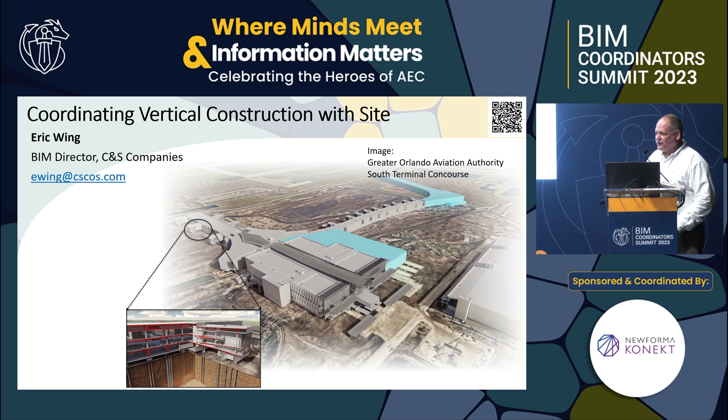So, right, this was on shared coordinates. There was one issue where they could not see it, like once they designed it and started building it, but FAA realized that perhaps there was some obstructions from the towers, so stuff had to move, and that's where this stuff starts to get off track, right?

So why are we talking about this? At first, I thought perhaps this was too remedial of a topic to bring to an event like this. It's basically coordination, shared coordinates in Revit, but there's software incompatibility, unfortunately. And it's Cesar's down here, there's no Autodesk people here, so I can go with it.

Their own products are not compatible with one another, right? You have to export stuff, you have to import stuff. It's such a workaround to get to where you need it to be. And it's tough to have to overcome that and not have a real workflow on how to frickin' do it.

Personnel incompatibility, right? Civil engineers, architects, vertical engineers, they just don't talk. I don't know, each one of us thinks our stuff is so much more difficult than your stuff, you can't comprehend how we build things. But it's that level of coordination that we need to come together. I just had to throw the word coordination in there because it's expected.

Poor or outdated site information, right? You go through all this stuff, you get your building on the shared coordinates, and like, wait, that's an old file, this is the actual survey. Damn it. That happens. It happens a lot.

And alignment mistakes, we'll get into that. We have to physically align the building with a line in AutoCAD and say, yeah, go. Let's do the $2.7 billion project with 50 different Revit models. Yeah, I think it's good. We got it, I aligned it to that line in frickin' Civil 3D, right? Or just ignoring it altogether.

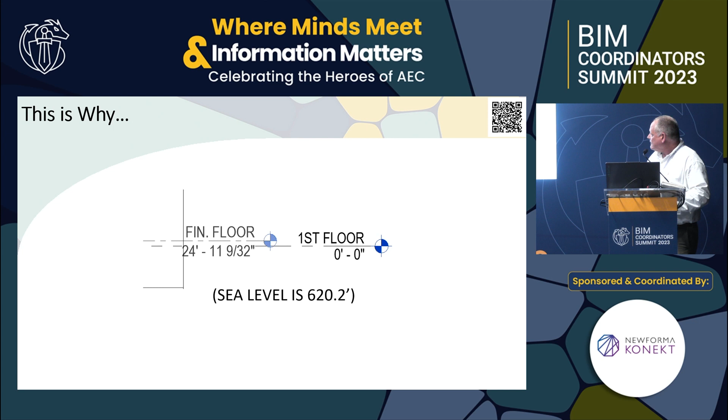So I'm looking at these models like, I don't know if this stuff is lined up or not, right? There's another one. Oh, that one, I guess they're lined up, right? I get these models and I'm looking, like something's not right here, something is not gonna work here. Look at, again, the 9/32. How stupid is that?

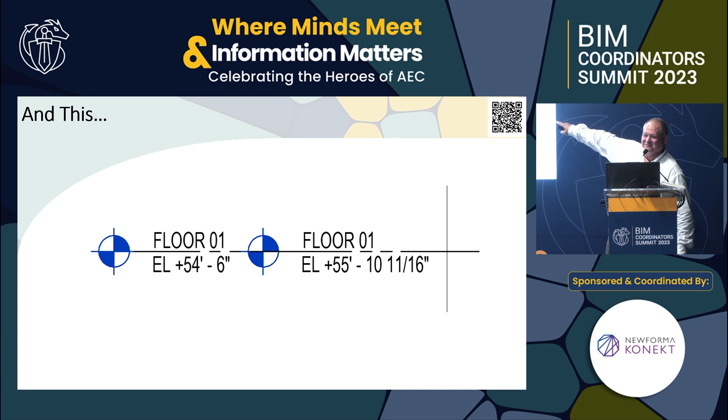Oh my God. Okay, so yeah, this one is, I don't even know why I do these slides right now, because literally I'm afraid to open these models up. Damn it, so that's all jacked up right there. And that is a project that we're working on now. It's a big airport, and yeah, so these are the things that happen.

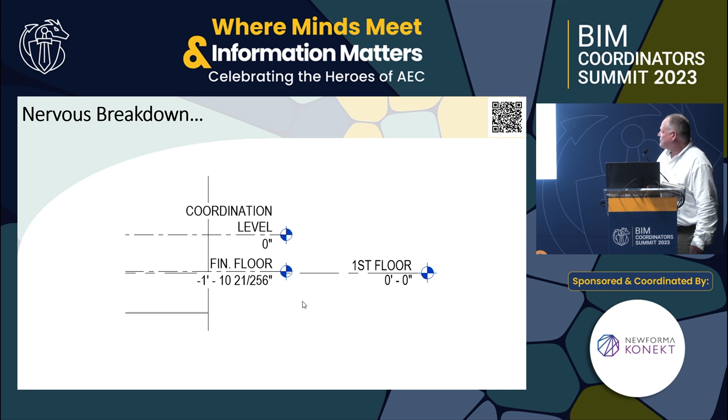But, oh, this one, you know, why do people do that? It's like, I want to move my building to 100 feet, that way I don't have a negative value. Well, recent project is on shared coordinates, and I have to adjust their level because they wanted to read the actual sea level elevation.

He's like, mine says 100. Why did you do that? He moved it, took it off shared coordinates, moved his building up 100 feet, and then was like, how come mine's not right? And it's a brand new building out in the middle of a field, so it should be an easy one. It's not even rotated true north.

And this too, right? That's not on shared coordinates. Hey, let's just move the point. Why are you messing with that? You can pin it, I guess. People pin that thing, it doesn't take Bill Gates to unpin it, because they want to just play with it. That really doesn't matter at the end of the day. It really doesn't, at least that base point is on the origin point.

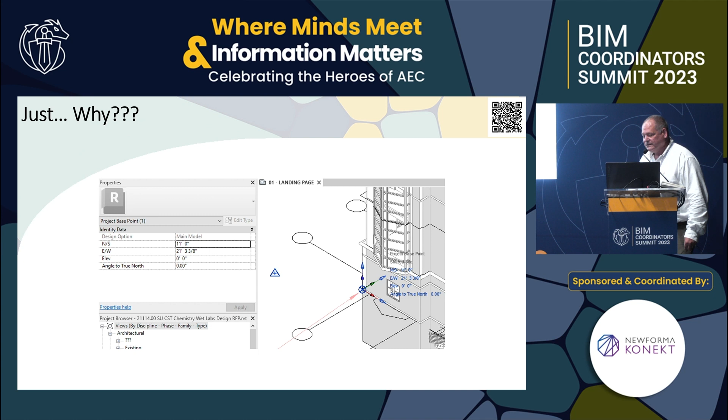Whatever. But the reason why I decided this would be a topic we could discuss is I inherited these projects. I didn't do that, that's my disclaimer, it wasn't me. I got all these projects for various reasons. I don't think any of it was a BIM disaster, but I'm jealous of the BIM manager.

I know them, they're big firms, and they all had huge, extensive BIM execution plans. And that stuff happens, I don't know what to do. Everything seems to be in the right spot, but I don't want to export this to even Navisworks because I'm afraid of what will happen. What I did was I just had them all in one and exported the entire model. I didn't do the separate ones because I know it's not going to be lined up.

But the thing is, these big BIM execution plans, to me, it's so much reading. You got links to other BIM execution plans, links to LOD, which is always 300. You don't have to make a case for all the different levels of detail or development. I don't even know what it's supposed to be. But geez, man, you got to get the other stuff right to begin with.

So we just ignore it. Let's ignore coordinating our buildings with site civil because it's difficult and it stresses me out, and there's a good chance my buildings aren't going to be lined up. And are we planning for the worst case scenario? With me, that's the worst case scenario, someone moving their thing, but all right, please don't do it again.

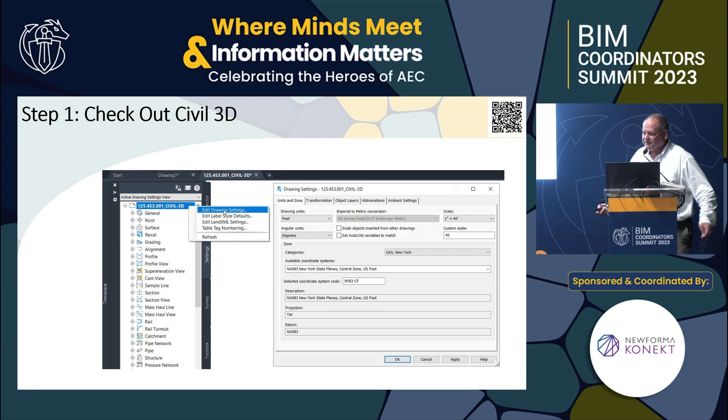It makes my skin crawl to go into AutoCAD too, but go into the civil model and make sure it's on some kind of coordinate system. Go in there and look at it, make sure you're good, because if you're bringing in bad data, your coordinates are going to be jacked up in Revit.

So this is where I veer off from what people like to do. I like to have a separate site model, because look at that - that's bad, geometry in the file is huge. That's a bad thing to have happen, it will mess your model up. If you get that error, it's bad.

And I like the elements lost on import warning - look what they try to do, try exploding the file in AutoCAD. These are the instructions coming right from Autodesk, they're telling you to explode it. Don't do that. Yeah, go into your civil engineer's model and explode all their pipe networks just so they show up in Revit. Great. And it's out of range.

I do that because this quarantines all that stuff. But I still need the live data - I want the civil engineer to work, and I want that live linked into something. So I set up a civil model, pull that in, and I can bring the other trades in, and work at it like a kind of project dashboard. And we can publish surfaces from Civil 3D too, we'll look at that in a second.

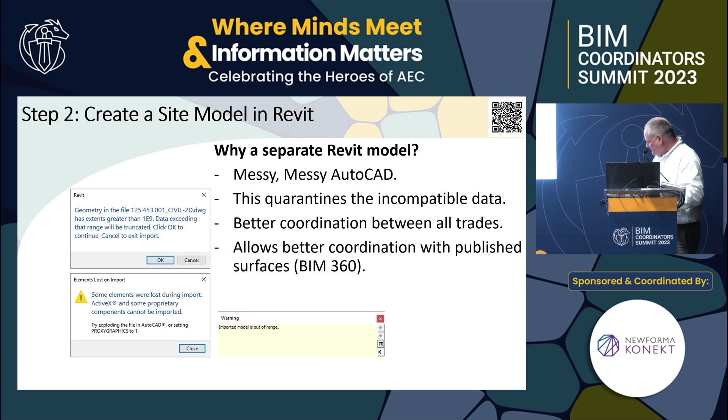These site points showed up, I think, in 2020.1. All of a sudden this thing shows up - like oh my God, there it is. That's like the holy grail. No one ever knew what it was, it was like folklore, like what is this? It's finally there, now I can see.

Oh man, I don't feel good about any projects I'm working on now. Project base point - I'm a firm believer that it should stay with that origin. People will disagree with me, that's fine. Survey point, that's your sea level. Try to keep them all lined up, it's in your best interest.

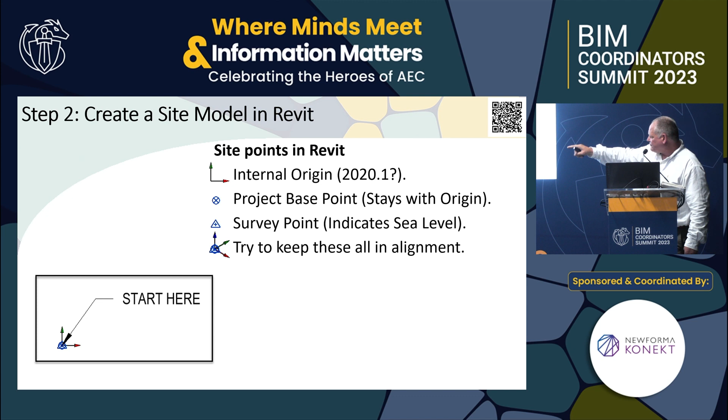The survey point we'll look at in a second, that can be at 0, because when we bring in Civil 3D, there's going to be line work at 0, and their surfaces and stuff up at the actual elevation, so that's fine. Even in my template now, when they open it up, it says start here.

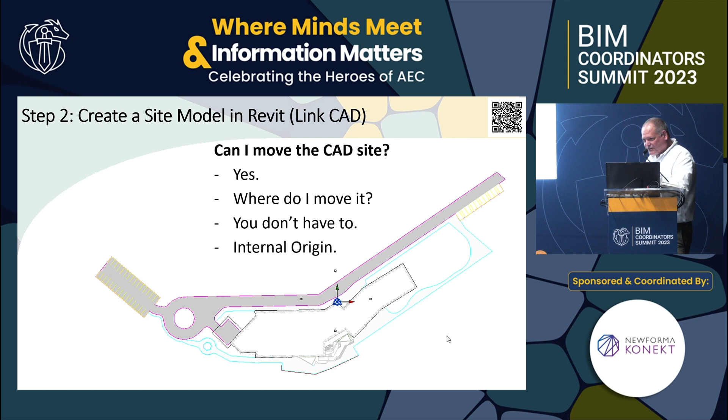So they kind of get confused with that. So can I move this site? Yeah, you can move it. I like to move it right to that point. If you have multiple buildings on the site, don't bother as long as it's in the neighborhood. Or sometimes I'll move that to an actual known survey point, and then we can acquire the coordinates.

And I always nervously spot check them - man, 15 minutes goes quick. Now we're going to locate the model, right, we're going to acquire the coordinates from the site civil. We check it, we bring in the architectural model or structural model, whatever you got modeled.

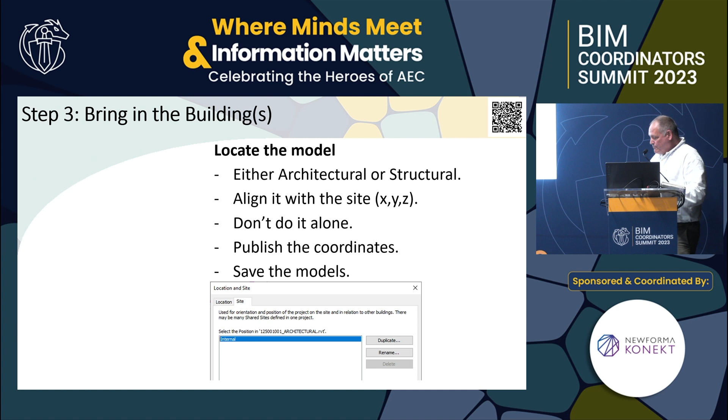And you got to do it, man, you got to move it. I like to move it up to the right elevation because Revit, for some reason, when you acquire coordinates, just ignores that value. So you got to manually do that - not by moving points, move the entire link, and then you're going to publish the coordinates to that model.

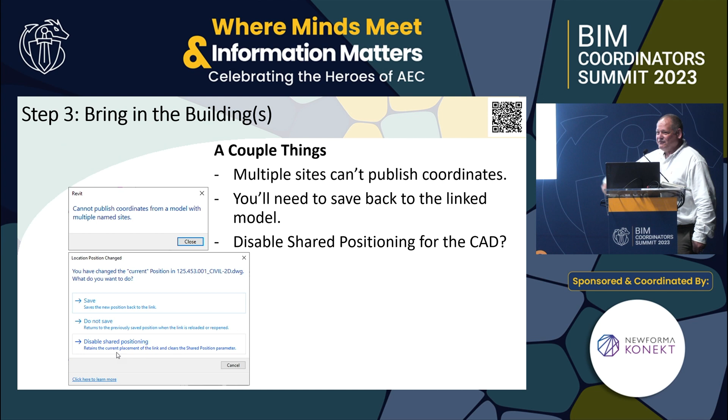But the problem is, if you have multiple sites, that's the worst thing you want to ever do, to me. That's my opinion, because no one knows what one is supposed to be. And you have to disable the shared positioning for the AutoCAD. Don't save that back, do not save that back. And then check it out.

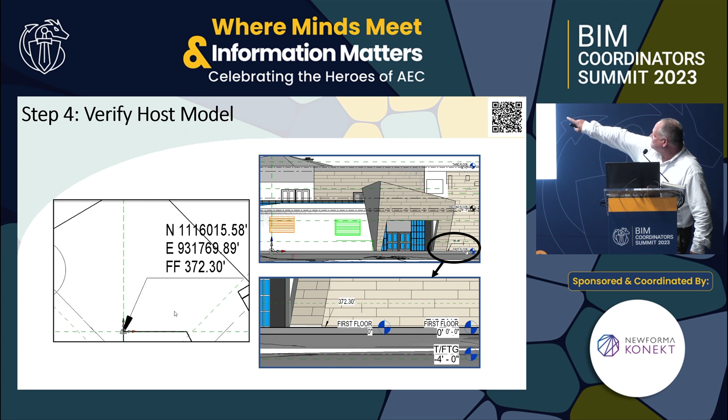I like to have first floor at 0, and then I can switch that to be the sea level elevation. Now we're in the right spot, we got our little arrows and all that stuff. And now we have choices.

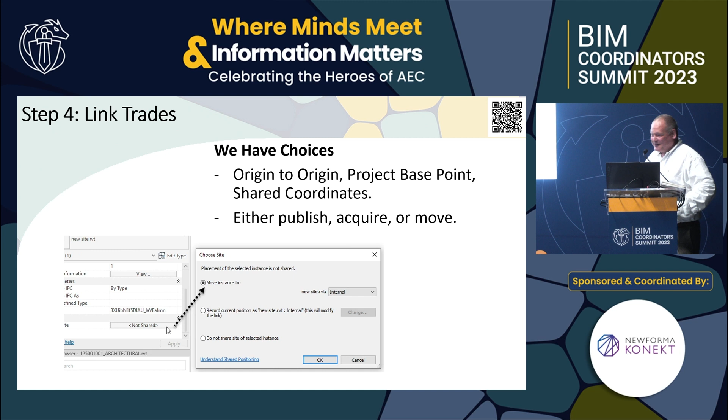In that worst case scenario, you can go origin to origin, project base point, or shared coordinates, whatever. If it's not right, you can just move it to the right spot - look at it when you're doing it. If it moves it to the wrong spot, stop, and then test it out again.

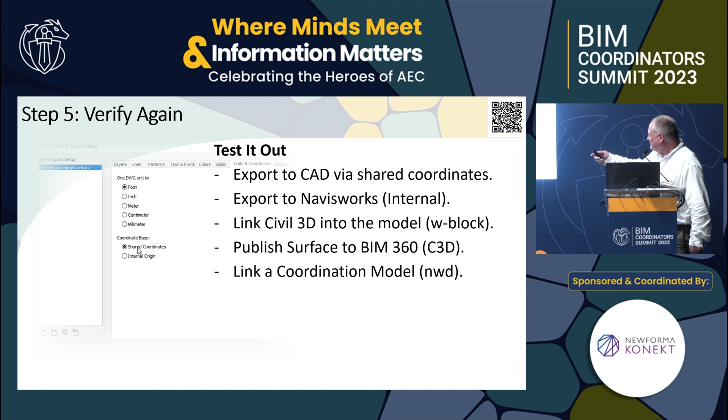I actually had a typo there that's supposed to say shared, but I let it go because even me, I can make mistakes when time's up. So that right there, my shared sites, you do not want that - you want that to say internal.